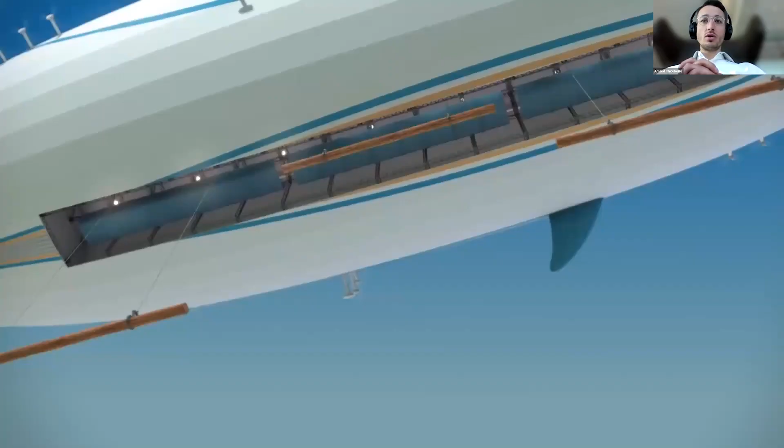So we are developing a rigid airship with a long cargo bay that you just saw. The cargo bay can hold, it's actually the length of a football field. We grab the loads for this application, for which we come from, let's say. We grab directly the loads while hovering up to the cargo bay, and then we transport it straight to the sawmill, and we go back and we do it again.

So here you can have an application which is very interesting when you have no airport, or let's say no big water airport, for such a ship. So we can take directly the containers and go straight to the delivery area.

So here is another application that is today done by helicopter, having a lot of different difficulties for assembly, the blades as well—I will show you this after.

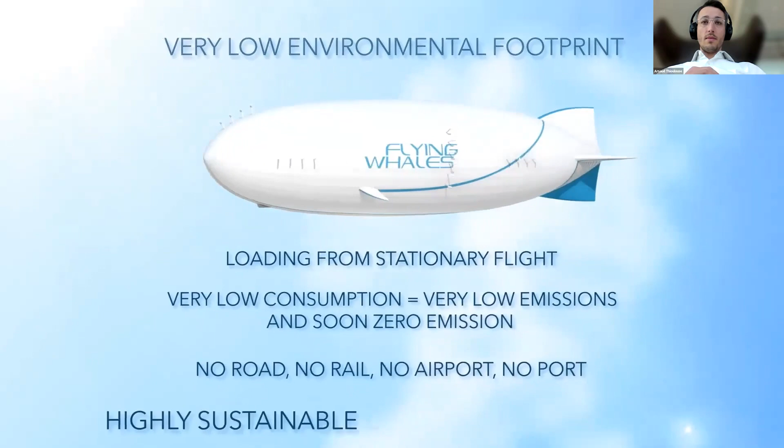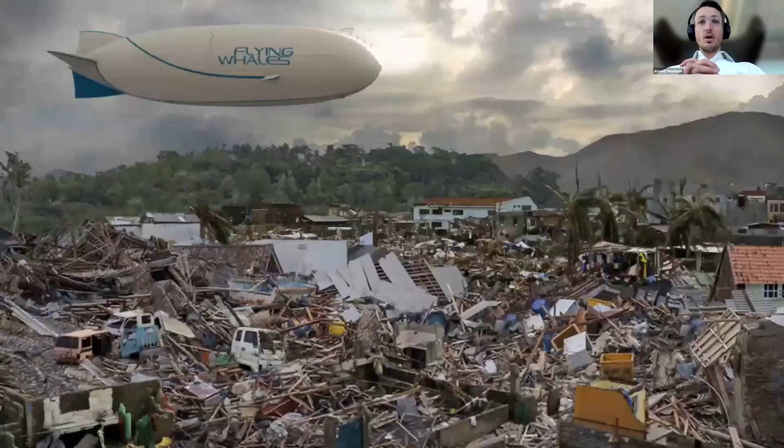So while you all know the good opportunities to have a very low consumption with an airship, thanks to the helium acting for the lift, here is an application in the French island, Polynesia Island, where they buried the garbage because they don't have any access to a big port.

Obviously, those applications are very interesting when you need immediate rescue. Thanks to our solution, we don't need any infrastructure. So by definition, when you have an earthquake or everything is broken, without any infrastructure, you can still use the airship. And also in areas where there is no infrastructure, that's where we believe we can help the cargo with an airship solution.

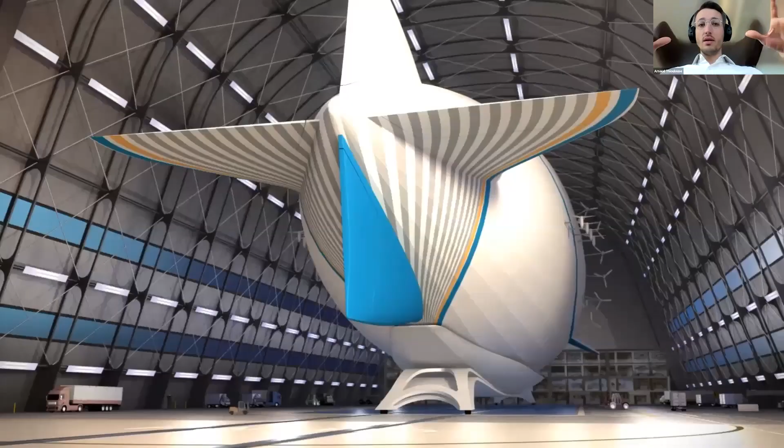So here you can see, this is a whole solution with the air dock. The air dock is capturing the airship, and the airship never lands, just floating on the air dock, so we can put it back to the hangar, being protected from the wind and the weather.

Okay, so let's start. We always start with our raison d'être to explain where we come from and what we would like to do. We are not building an airship for building an airship. We just realized that airship was the best solution to unlock territories that are remote, without any infrastructure, and airship can help to reduce a lot the environmental footprint of cargo in a different way, either by the emission.

So what is our adventure? We come from the wood industry, and it's actually our president who had a discussion with the president of the ONF, the French agency taking care of the forest in France. We have a big issue in France, wood is the second contributor to the trade deficit. But we have one of the largest forests, so we need to find solutions to remove wood from remote forests, and it ended up having the airship be a very good solution.

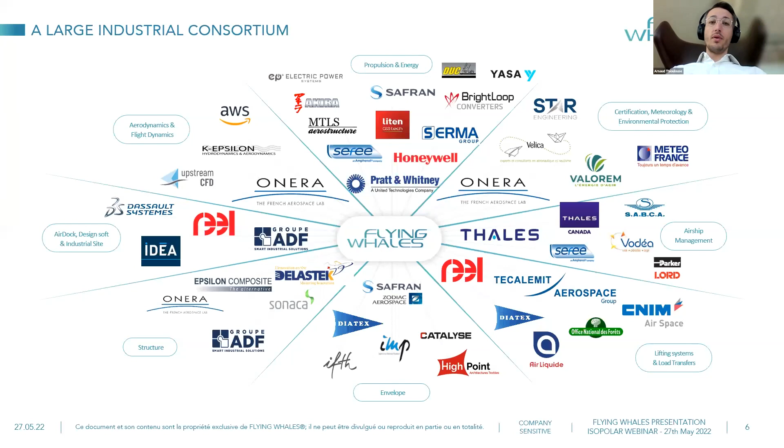Some are very famous and very big, such as Pratt & Whitney, Honeywell, Safran. But we also have mid-sized companies in the industry, not necessarily in aerospace, which makes a very good mix of good partners, most of them risk-sharing partners, meaning they are embarking on this journey, putting in their own risk due to the interest of the solution and the work we are doing together.

So where we are today, what is Flying Whales? Flying Whales, we today have two companies: Flying Whales, with part from Quebec and part from France, and Flying Whales Quebec, a subsidiary which belongs to Flying Whales and the Quebec government. The Quebec government entered into capital in 2019.

On the French part, we have a mix of public actors, like Office National des Forêts, as I said, which is actually our first customer, but also shareholder. We have La Région Nouvelle-Aquitaine, who will build our final assembly line, but also big industrial companies such as Bouygues Construction, which is very interested in the construction of our infrastructure, but also Aéroport de Paris, which is one of the biggest airport actors in the world, and Air Liquide, which is obviously very interested to be a supplier to us for the helium, and also a financial investor.

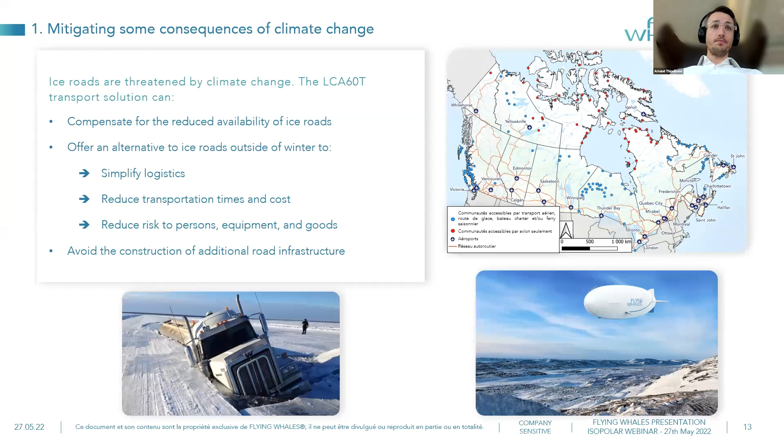We can see all the different communities that are in extremely remote areas. We identified a use case which is really interesting to look at - the community of Kashechewan, which is having, year after year, more flooding due to climate change. So they decided to move this community 20 kilometers away. The cost was estimated to be between 500 to 800 million dollars, which is extremely high for the size of this community.

We worked a little bit on this case to identify what would be the gain of having an airship such as ours to help relocalize this community, and we ended up with an estimated cost of only a fraction of what was estimated - about 20 million dollars.

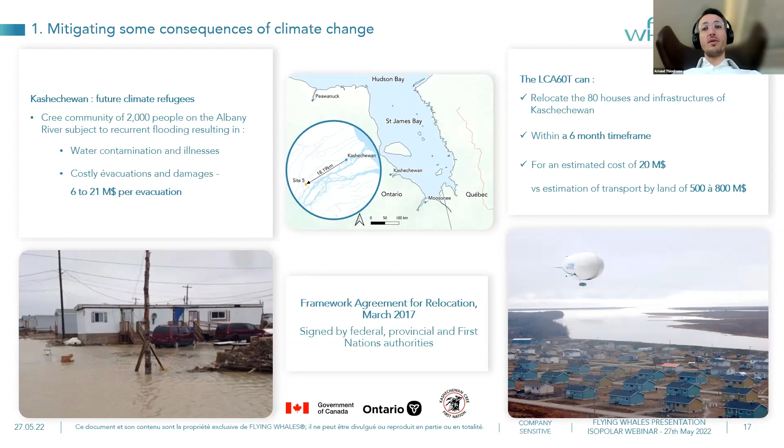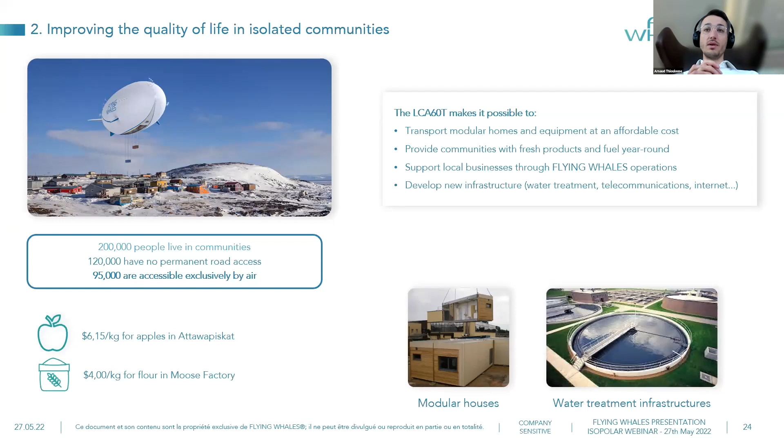As we are talking about remote communities, there are only some regular supplies that are very difficult to provide up north, and that are done through airplane today. When you use an airplane, you arrive at an airport which is still not the community. So logistics is very difficult, which makes the products extremely expensive. This will help a lot with the airship, as we can transport houses in kit, for example, or fresh produce directly to the communities.

This is a very interesting application we've been working on for a year now, but it was not our first thing. We discovered recently that we would have a very interesting application transporting a hospital that could help communities not having access to medicine today, being able on a regular basis to have the hospital coming to them.

It helps in a way that you won't have to build as many hospitals as communities; you just need to build one. You will always have good operating medical systems with good maintenance, so you don't have issues of broken equipment and so on, and also it helps people plan all these visits. So this is very interesting where you have spread communities in different areas.

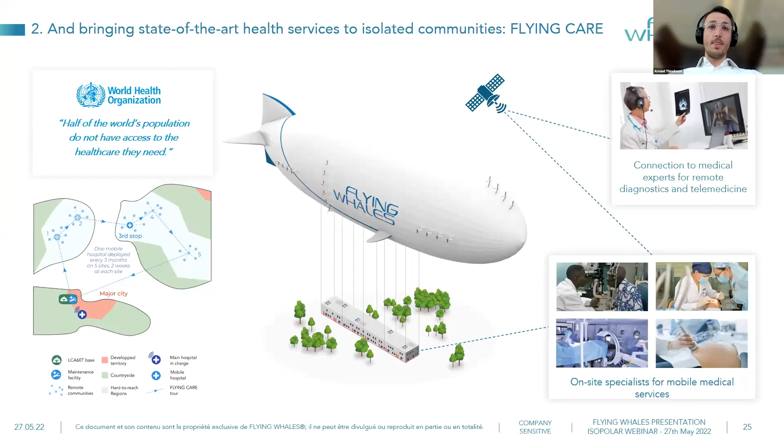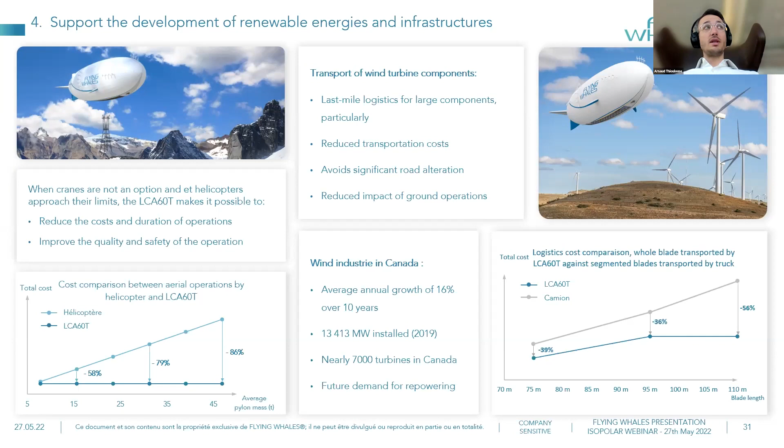There is an annual growth of 16% per year, which makes a lot of work to be done to transport those wind turbines. And also, there is not only new installation; there's a lot of repowering, because the life cycle of a wind turbine creates a lot of recurring activities over time.

To finish this presentation, we will talk a little bit about how we will improve the solution in the future. The airship is extremely interesting as the emissions and energy consumption are very low per ton compared to other aircraft or helicopters. But still, we are using petrol to convert and create our electrical system up to the motors, so that's why we are working on a solution which will be totally sustainable.

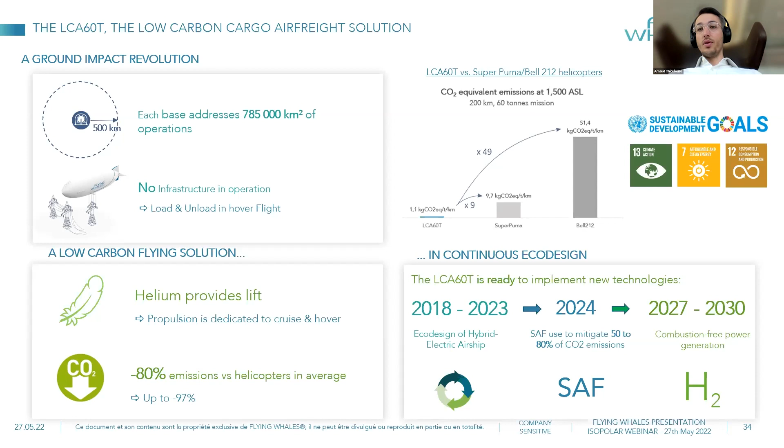As I said, we continue to improve. By 2024, we will get using sustainable aviation fuel, but the ultimate goal is to be combustion-free power generation by hydrogen, which makes zero emissions in operations. So how do we do that?

We actually will have an architecture today that makes it possible to switch our turbo generator by a fuel cell without needing to change the downstream network, which is electrical propulsion distribution, and the propellers, which is already electrical.

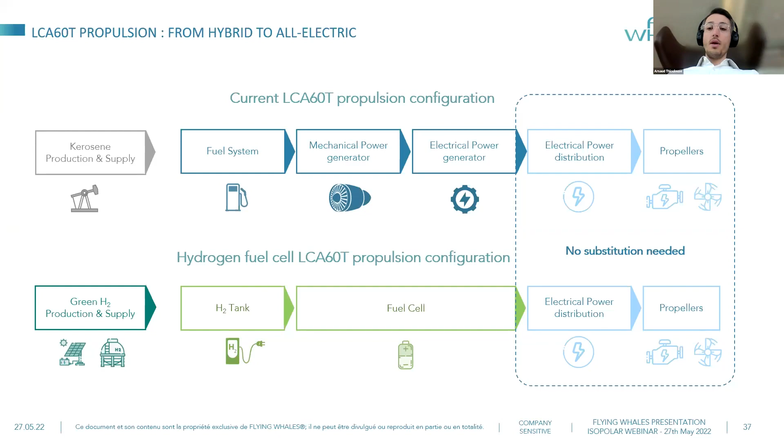So that's where we are today, showing us the interest of having the airship for remote operation, the interest of having airships for reducing cargo emissions in operations, and the way we will strive to have zero emission in the end. So thank you very much.

I hope you were not too disturbed by the airport noise, and I hope I was clear enough in my explanation.

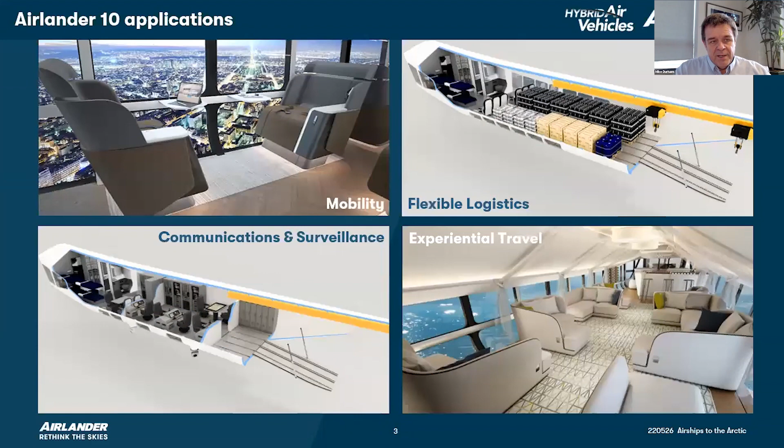But the roles we're currently focused in on, and this is purely about Airlander 10 today. I'll talk a little bit to our expansion plans in due course, but really for Airlander 10, it's a bit on the small side for a full up freighter. We've talked to customers, and there are definitely niche markets for 10 to 12 tons of freight over 1,000 miles. But really, you want economy of scale, and that's where we drive to with our bigger products for the freight side of things.

What we have picked up from customers, they are so keen to be able to operate from water. There's a lot of enthusiasm for getting away from airports to start with. But if we can get away from finding greenfield sites or landing on rocks and stuff, water operation is definitely a flavour of the month, shall we say, at the moment from the customer base we've seen. And it enables us on some of the configurations for Airlander 10.

So passenger mobility, we've been looking at sort of the 100-seat area of city to city passenger movement. And there's no doubt there's some real enthusiasm out there to be able, not necessarily to get from city centre to city centre any quicker, but to do it differently. And one of the opportunities for us is, many city centres or close to near to, they have large areas of water. There is an opportunity to change the number of segments of travel you have, not having to go out of town to an airport and then back into town from the airport at the other end.

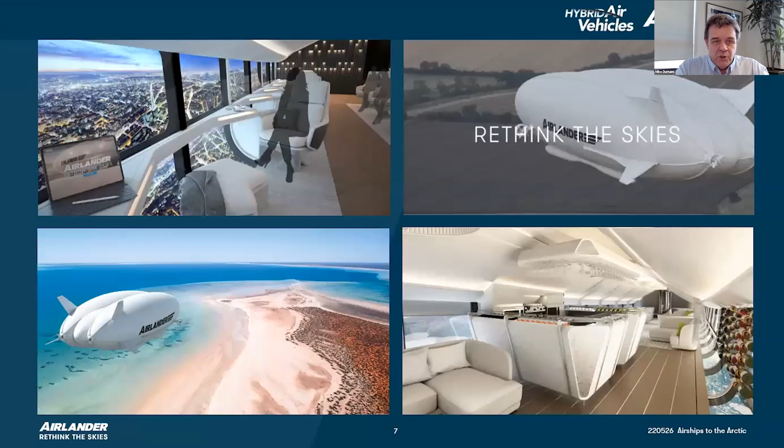We've been a development business for many years, and now we see ourselves as a production business. We've had the luxury, if I can call it that—a horrible way of talking about COVID, which has been a terrible thing—but as an engineering team we've managed to work through that. We've had 2 extra years to make sure the product we're bringing out answers the challenges out there, and it's going to be an exciting journey ahead. We're trying to deliver operational cost reductions to the transport industry and support initiatives like net zero and zero climate impact. There's a big challenge ahead, but we're up to it.

Just to wrap up, it'll be good to see more of you face to face at the conference later in the year. I think we'll focus a bit more on the technology piece there—what does an Airlander 10 actually do, how does it work for underserved places like the Canadian High North, or congested places? How might we work within containerized logistics? We'll talk a bit about our Airlander 50 and how that works as a container aircraft.

Fundamentally, we see the future of aerospace as not a one-size-fits-all solution. Our goal is just to be able to deliver societal good whilst reducing the impact on the planet. That's what we're all about. So thank you for your time.

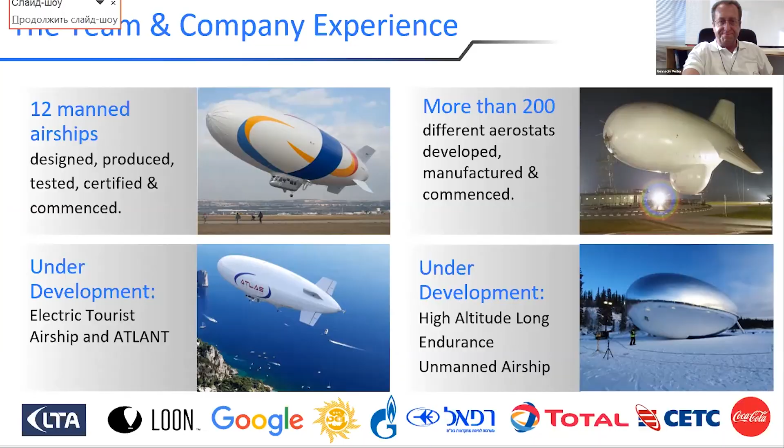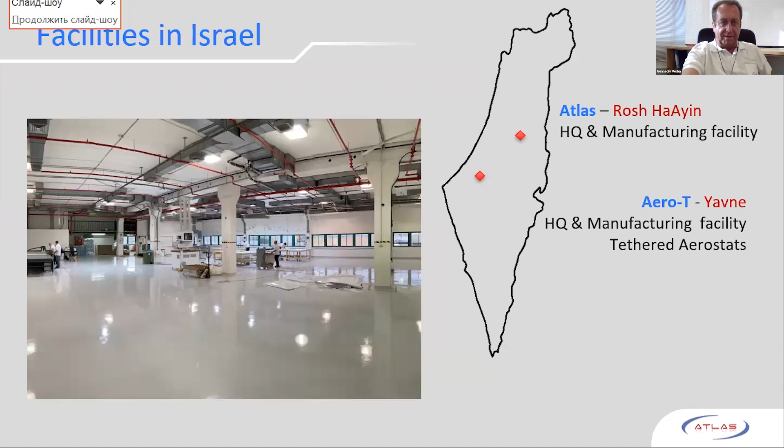So as I said, we had some kind of experience in lighter-than-air. During the last 30 years, we built 12 manned airships, and a lot of tethered systems. Right now we are working on development of sightseeing airships and also high altitude platforms. We are located in Israel. We have 2 locations, one of them in central Israel, near the town of Rosh HaAyin, not far from Tel Aviv. Another one, specific facilities devoted to tethered aerostats in the south of central Israel.

So there are several directions of lighter-than-air activities in Atlas LTA. The first one and most important for us is high altitude platforms. We used to work for Alphabet Loon for over 4 years, and we created a new hybrid concept of variable buoyancy motorized balloons. We wouldn't say airships, but motorized balloons. You can see the launch of this balloon.

Working on this project, we created new types of materials, new types of helium and hydrogen holding films, super strong and super light, capable of working in very harsh conditions of very high UV radiation and low temperatures. By the way, you see the picture of a low temperature ground test. We did this test in Canada, near Yellowknife in winter. It was almost like -40, very challenging, but very good memories about this test.

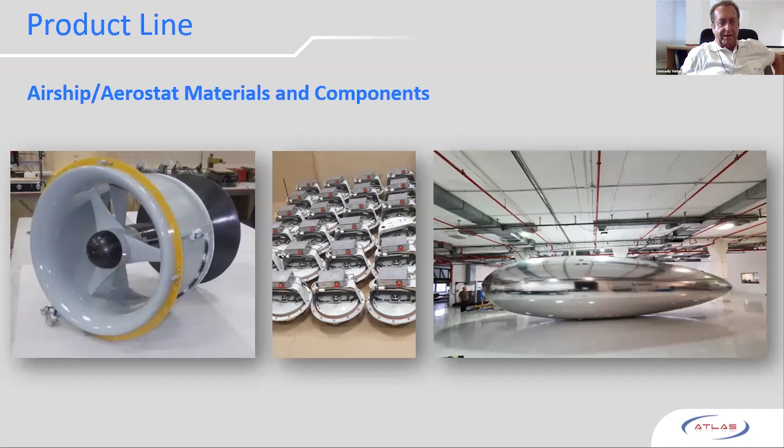Beside that, we design and produce different components for lighter than air vehicles, like blowers, valves, and gas bags for rigid airships. We think that our experience with high altitude is very useful for that, because we can use this same or similar extremely light and helium-proof films and textiles for gas bags.

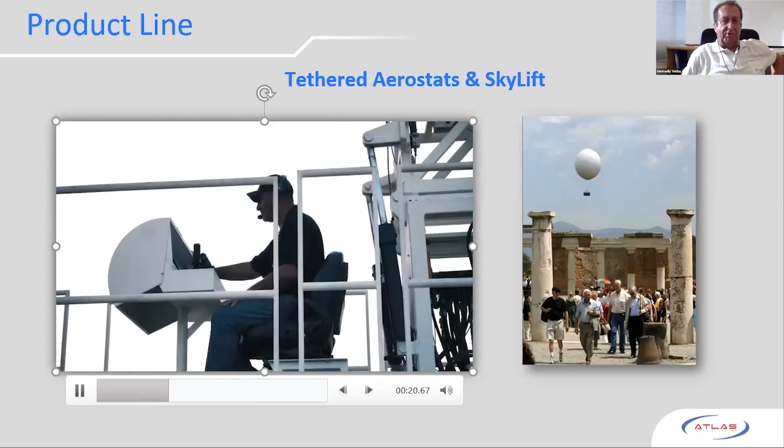Also, we produce various types of tethered aerostats, which is used for defense and sometimes for tourism, like our Skylift. Right now, Skylift is going to be certified in Israel and installed for the first time in the center of Jerusalem. Beside that, the tethered systems are extremely effective for persistent surveillance and communication purposes.

But the main project for us is Atlant, which is a heavy cargo aerial vehicle. For the beginning, we have 2 models, 16 tons and 60 tons. And in the nearest future, we will start developing the 165 tons vehicle.

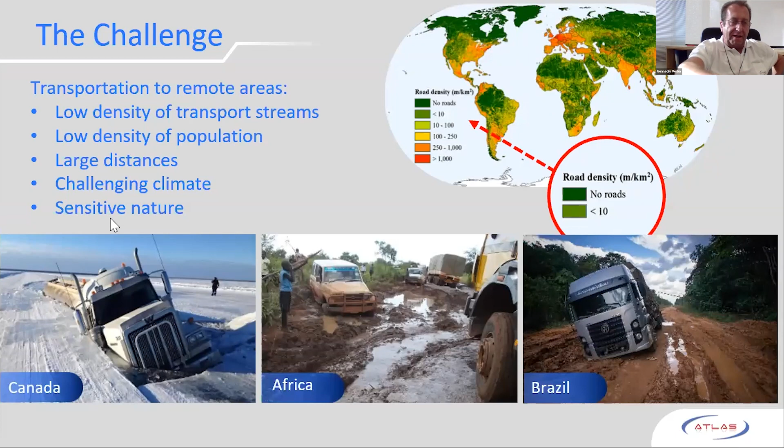We designed them mostly for 2 cargo niches of the cargo market. First one is remote areas delivery, cargo delivery. As you know, this market is very demanded in Canada, and not only in Canada — in different climate conditions this kind of activity can be extremely important.

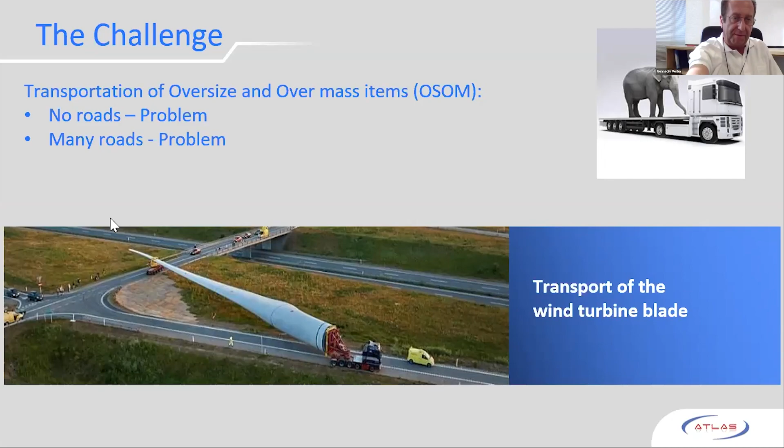Another type is oversize, overmass cargo delivery. A great example is windmill blades, which are extremely difficult to transport using trucks or any other ground systems. Both of those markets are niche, but this niche is quite big. If you look at the size of the market, it is estimated by the international expert community at over 20 billion.

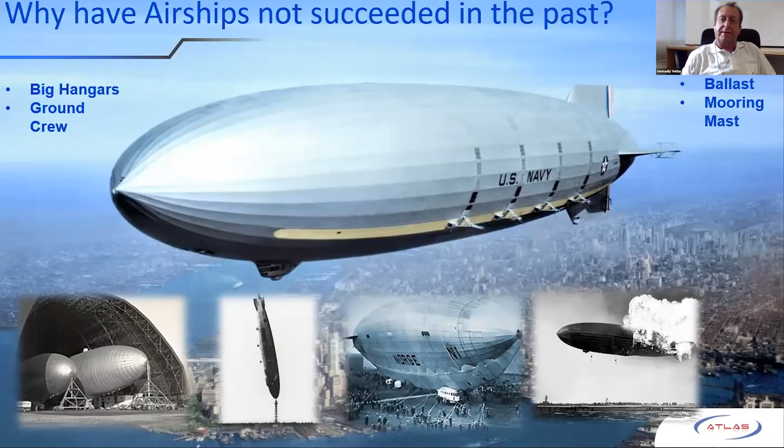Many people are asking why, by now, any airship projects haven't succeeded practically. In the past we had beautiful airships, and the natural question is why those creations didn't succeed. We have practical experience with conventional airships, and our answer is mostly that the problem is with ground infrastructure, like big hangars, ground crews, and also operational difficulties, like the need for ballast. In the past, there was use of hydrogen and some other very important issues.

We had to learn from that, and we created a newer concept, which is basically designed to perform point-to-point delivery of heavy cargo and delivery to unprepared sites. In the future, when the regulations are developed, we can perform unmanned flights.

We are aiming for low operational cost, very large cargo size, and of course, which is very important now, it should be very sustainable, with very low CO2 emissions. Also very important — it should have the ability to operate in harsh weather conditions.

We are aimed at operation with physical landing on the ground, surviving not only in flight but also after landing, because it's also very challenging in the north and in harsh weather conditions like snow, very cold weather, and very windy conditions.

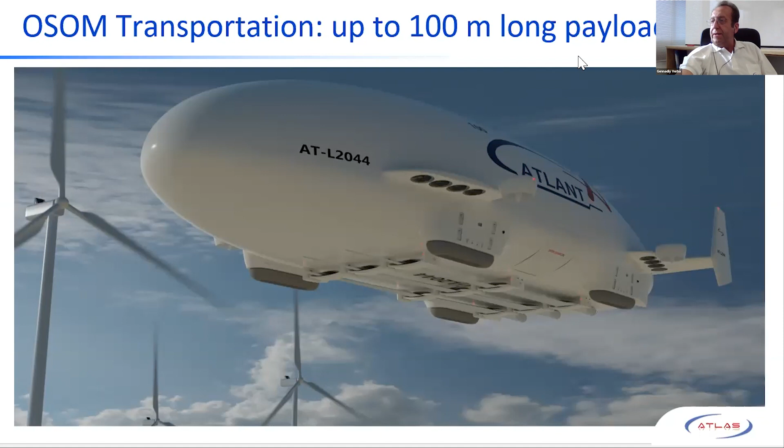Another challenge is very large cargo. Although we have a very large cargo bay, we also consider carrying cargo outside the cargo bay.

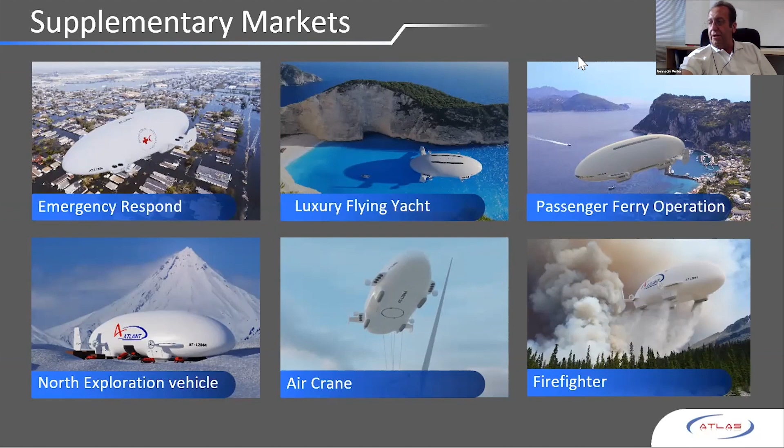So here are additional ways of using our Atlant, like emergency response, which is very important. Of course, luxury travel and passenger travel. Very important is northern exploration, capability to carry cargo on trusses, with limited weather conditions, and also firefighting operations.

It's important to say that our design is very suitable for quite large passenger space inside the Atlant. It's about 460 square meters for the smallest Atlant, which is Atlant 30. We can accommodate passengers and create public areas on board, and the capability to land anywhere makes this configuration very effective for experiential travel.

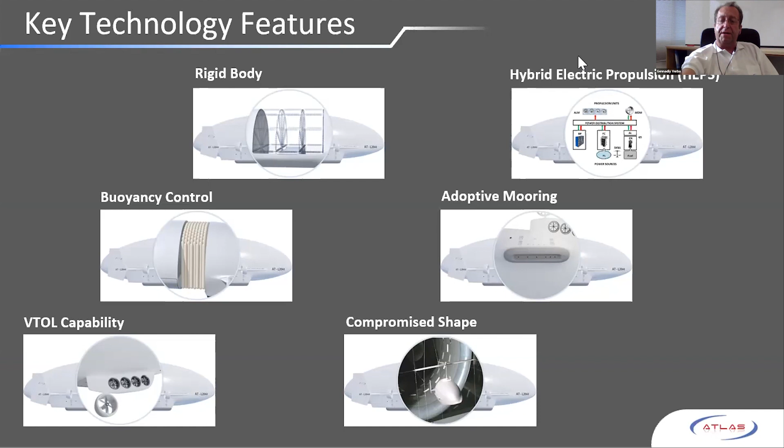Using pressurized air as ballast. Also, we need to have VTOL capability — the ability to land on any flat surface using adaptive mooring, which we'll talk about later. And also, of course, a compromised shape, which is typical for hybrid airships.

Let me launch a small video with sound explaining most of that.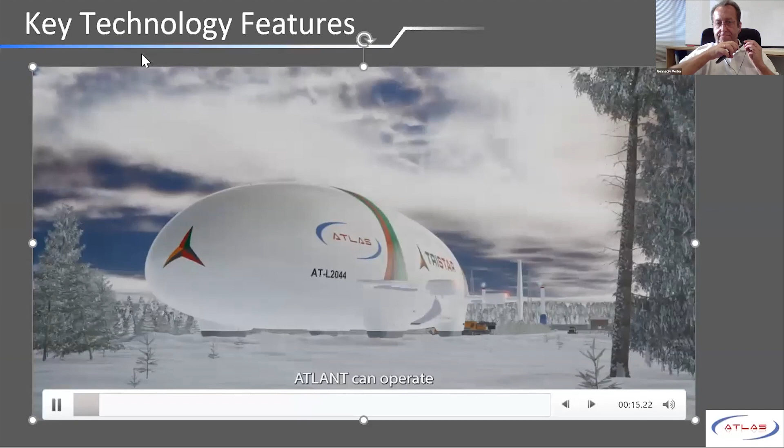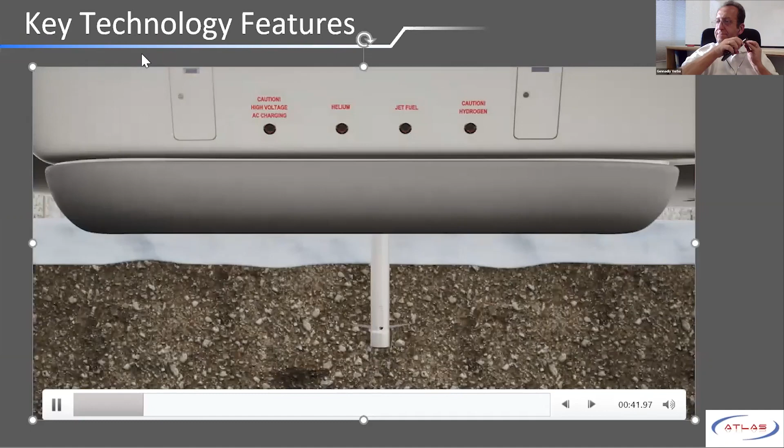Atlant can operate in most all conditions from -50 to 70 degrees Celsius, in rain, snow, or any other weather. Atlant can land on a flat surface, and when landing on the ground, deploys its self-mooring system to anchor the aircraft in one place. It requires no infrastructure and can reach its destination directly.

The Atlant 100 can carry up to 60 metric tons, and the much larger Atlant 300 can carry up to 150 tons. The cargo bay is enormous, up to 36 by 11 by 7 meters in dimension, totaling 2,400 cubic meters. Compared to other large cargo aircraft, they are all dwarfed by the Atlant 100. Oversized cargo such as turbine blades can be externally mounted.

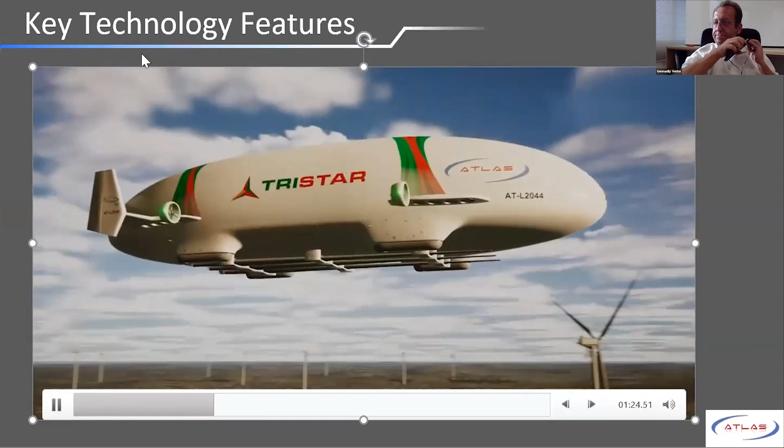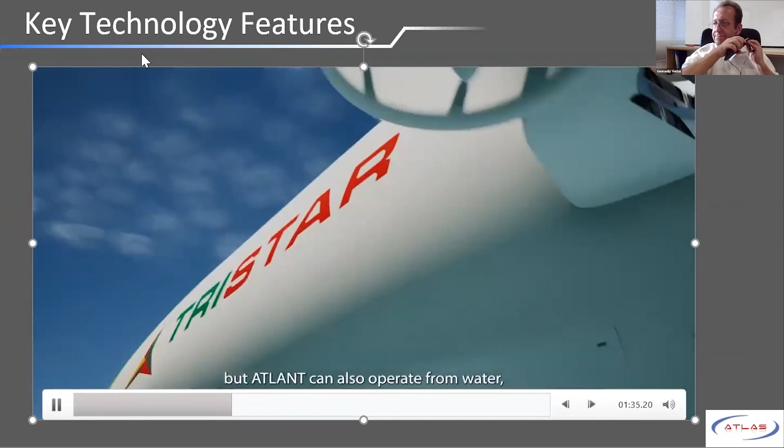We've seen Atlant's ground anchors, but Atlant can also operate from water, even in waves up to 2 meters high. The Atlant's water mooring system works by lowering an empty tube into the water, which fills with water, thereby creating a sea anchor that keeps the aircraft stable.

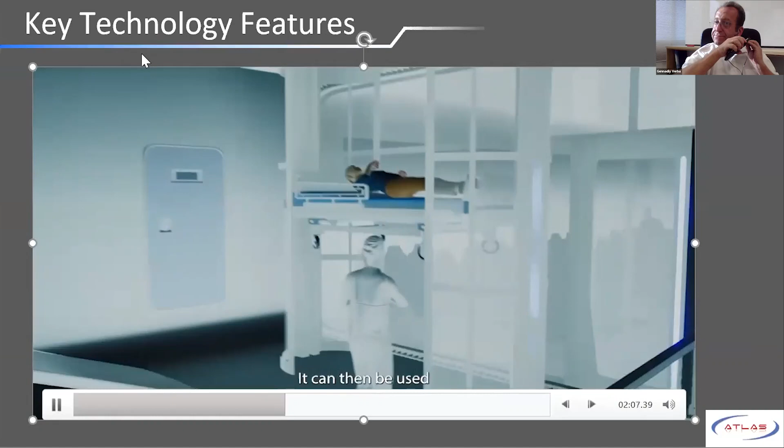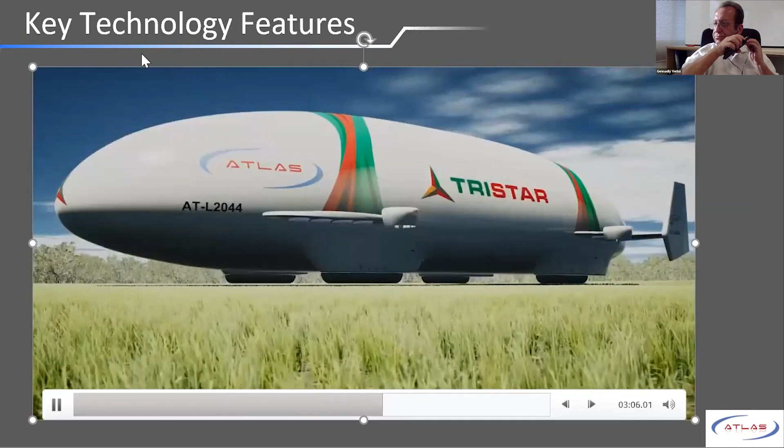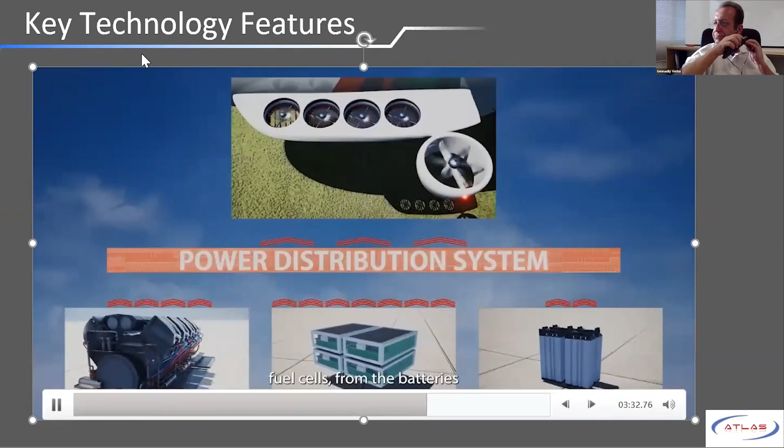The Atlant is VTOL capable. For this type of VTOL operation, 3 to 4 times the power is needed for a short period. Besides the main power sources, which are diesel generator sets and fuel cells, for VTOL operations we use high-capacity battery packs designed for very rapid discharge. During the vertical phase of flight, power is put into the power distribution system from the hydrogen fuel cells, the batteries, and the diesel generator sets all at the same time. However, when we transition to horizontal flight, the diesel generator sets and hydrogen fuel cells feed the power distribution system, which is used by the main drive, but also to charge the batteries.

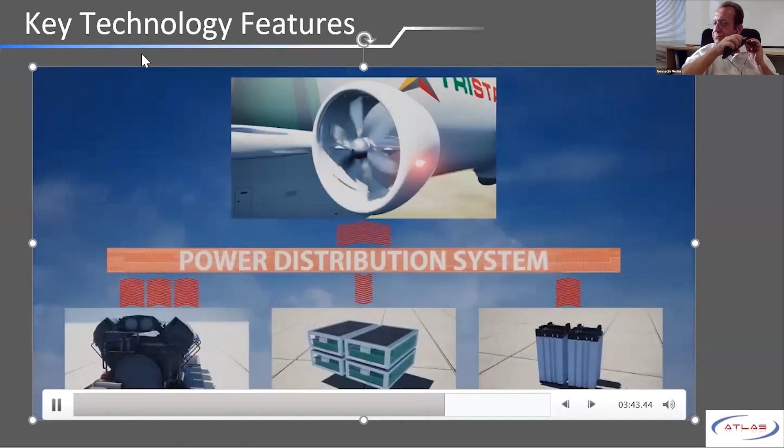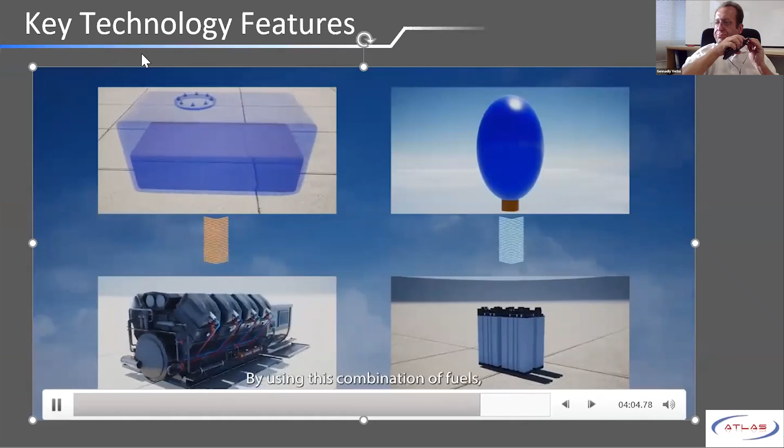To ensure that the airship remains in balance during horizontal flight, we use both hydrogen to power the hydrogen fuel cells and diesel or jet fuel to power diesel generator sets. We call it the dual fuel ballasting system, the DFBS. By using this combination of fuels, we keep the airship in balance, because as we use hydrogen in the fuel cells, the amount of lift reduces, while concurrently the weight of the aircraft reduces as we burn jet fuel or diesel.

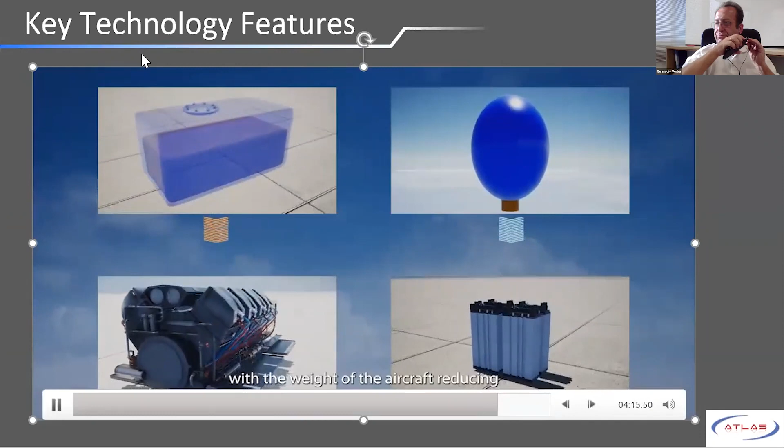The footprint for each ton kilometer is reduced by up to 70% compared to traditional cargo airplanes, and up to 4 times less carbon footprint compared to the most efficient helicopters in service today.

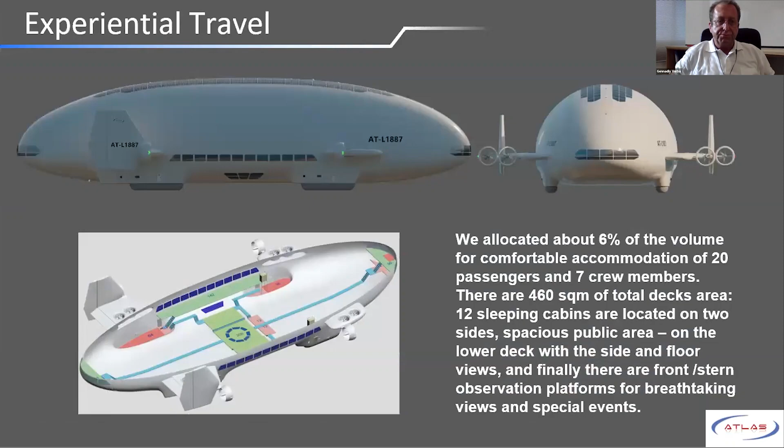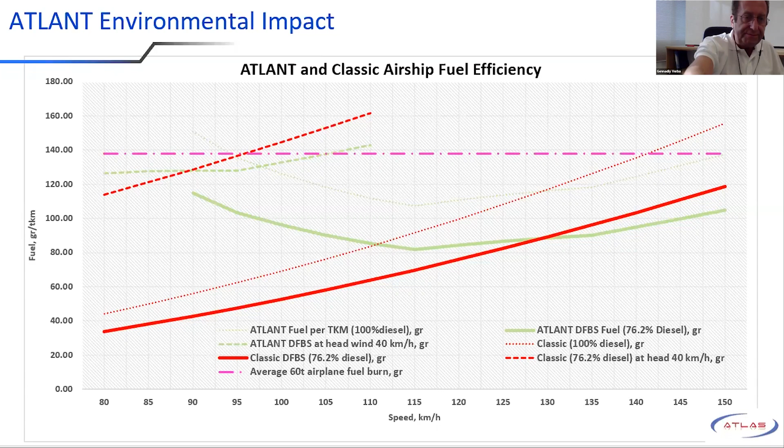But the next step will be a fully electric or hydrogen hybrid electric version, which will use hydrogen and fuel cells. In our projection, we think we can achieve this result much faster than fixed-wing aviation. You see the comparison: 10 years, not 15 years. The weight impact is much less. I will explain why we have this advantage. And additional cost is also less than for fixed-wing aircrafts.

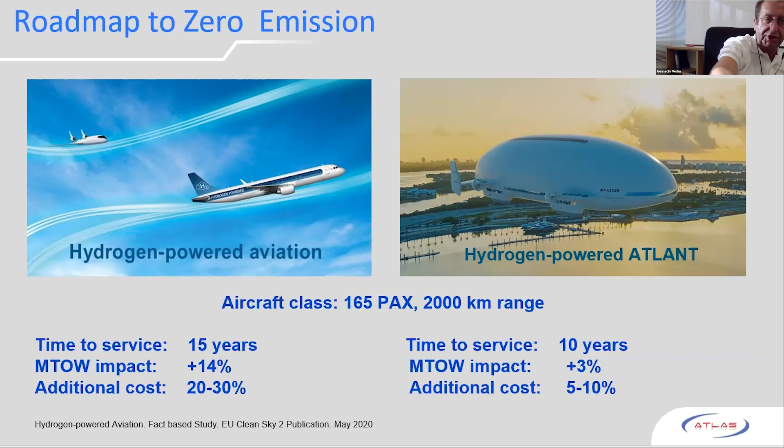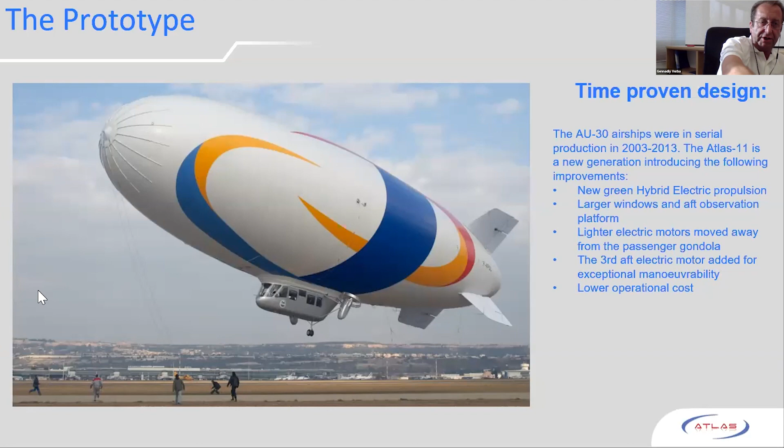A very important step toward Atlant is building the conventional airship for sightseeing, which is much smaller, but with scalability of the technology leading to the Atlant. It is based on the time-proven design of the AU-30 airship, which we produced back 15 years ago. We produced 5 of them and used them in different conditions, including cold weather. We decided to make a deep modification of this airship, changing the propulsion to electrical and hybrid electric systems.

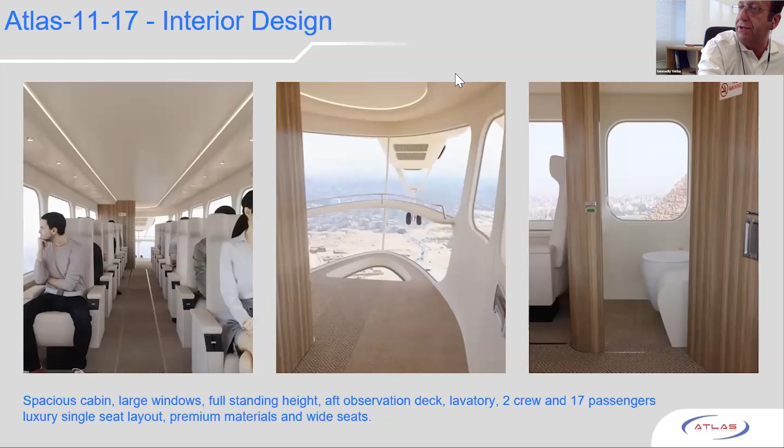Here is the appearance of this aircraft. We moved the propulsors far from the passenger gondola and also added a third propulsion unit, located on the back of the envelope, adding maneuverability. Also, some design features provide unique comfort in the first class cabin and also in the economy class cabin. But the main difference is the

electric propulsion, which is under development together with our partners, an Israeli company called Albus. It is based on a diesel generator, using a German diesel engine, red A03, and a battery pack. But in the future, the same airship can be a perfect base to test the hybrid electric system. The hybrid electric system will replace the diesel genset with fuel cells.

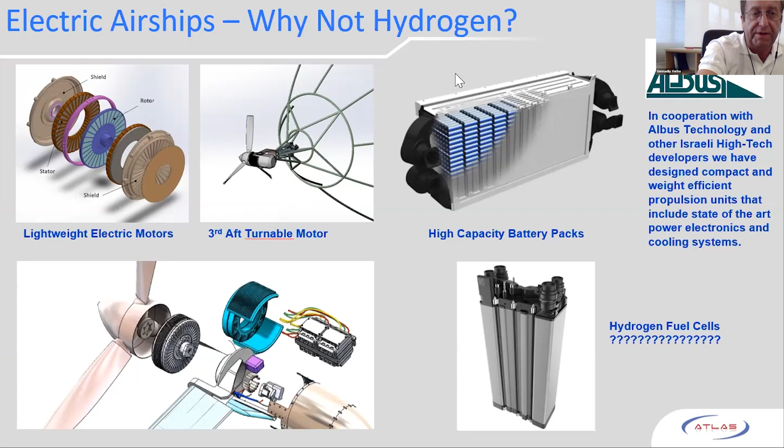But the most important thing is how we are going to store hydrogen. It sounds probably a little bit difficult from the point of view of certification authorities. We are storing hydrogen inside the helium envelope in separate volumes, in separate envelopes. Again, those envelopes are also based on our achievement in material development.

As you see from the beginning of the flight, we have a minimal heaviness of 50 kilograms, but by burning hydrogen, we increase the heaviness, bringing it to 300 kilograms after 5%, after 100 minutes of flight, and then 600 kilograms after 200 minutes of flight. For an 11,000 cubic meter airship this is completely acceptable heaviness, less than 7%, and 200 minutes is more than enough for any sightseeing flight.

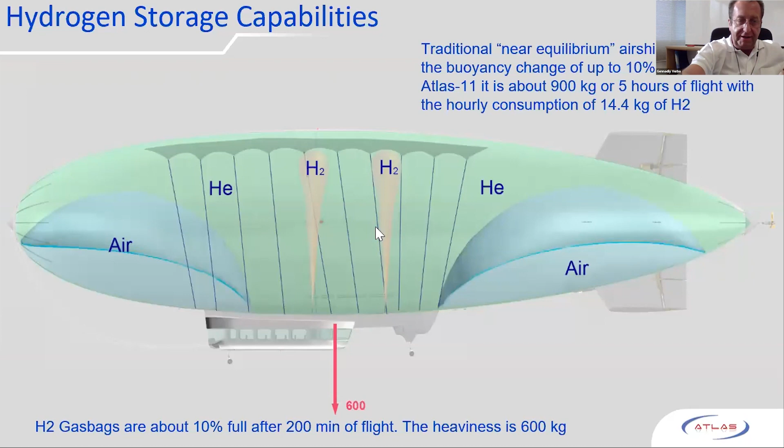So this is the chart showing the requirements for fuel cells. The fuel cells have power starting from 240 kilowatts for cruise flight and ending up at 330 kilowatts for the maximal speed mode. The gap between them, as you see on the chart, will be covered by the batteries for a short time.

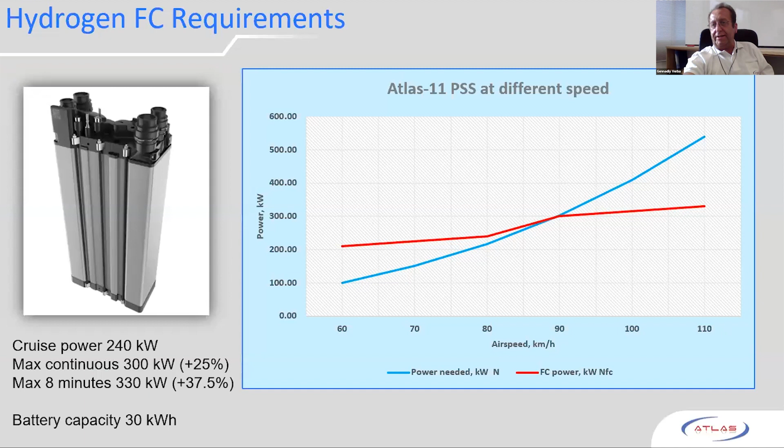So that's a very important step toward Atlant, because the smaller Atlant 30 is basically 4 times bigger from the propulsion point of view than the Atlas 11 airship, and we just use 4 propulsion systems of Atlas 11 to build the first Atlant.

So basically that's all. Thank you very much, and I'm ready to answer the questions.

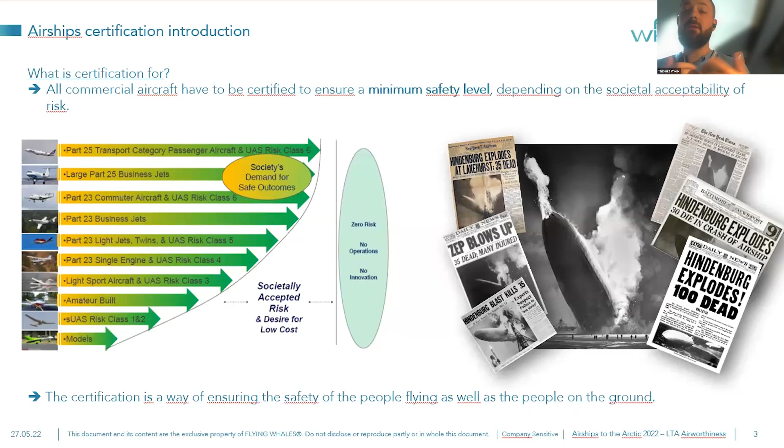So for airships, we have to go in the same direction. We have to find where we should position ourselves on this scale. What is the proper level of safety we should put in place, that we should ask airships to comply with? And then what is the proper level of certification we have to comply with and make the demonstration for? So that was the first idea.

Then when we want to go deeper into what certification is, certification is not just certifying a product. Okay, the type certificate is one thing, but actually you have a lot of other things that have to be certified. I put here in my slide some different approvals that any company developing, producing, operating, or maintaining airships or airplanes has to comply with.

So a lot of approvals that they have to get. Actually, certification is for any type of entity that is part of building up this machine, making it fly, operating it, maintaining it. So you have to certify the product, you have to certify the company that is designing the product, the company that is producing the product, the company that is operating the product, even the company that is licensing the maintenance personnel. So you have to have a lot of approvals.

Again, this can be seen as a huge administrative burden, but it's a useful one, because this is the only way to make sure that we'll make no mistakes, and at the end of the day, we will develop and operate a safe product.

You have to work with several civil aviation authorities, regulators. So we have ICAO, the International Civil Aviation Organization, an entity from the UN located in Montreal. But you also have in each country a civil aviation authority. In Europe we have EASA, in Canada you have TCCA, the USA has the FAA. And so you have to make demonstrations to these authorities to make sure that you are developing a safe product.

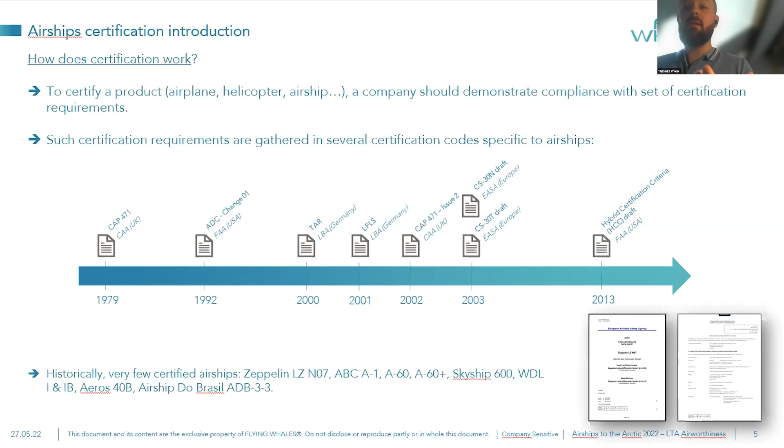The problem we faced at Flying Whales many years ago, when we started building this machine, was: what kind of regulations should we take to certify it? At this time my head of design organization and CTO asked me, okay Thibault, what are the set of requirements I have to comply with?

I looked at the existing codes and said, okay, CS30T or TAR, Transport Airship Requirements, built for the Cargo Lifter project more than 20 years ago, made the most sense for us. So I pushed that code to him and his team.

A few months later he came back to me saying, well, this is so complex to comply with, it's not adapted to what we want to do. It's too design prescriptive, it doesn't capture the design and operational specificities of our airship, and we don't really understand the history of these requirements.

When I looked deep into this code, what bothered me a lot was that the safety objective supposed to be covered by this code was not really the one we identified. So we were missing the real target of what a certification code is meant for, which is to cover safety objectives. So we had this issue.

CS30T was only partially applicable. I'll put up the schematic of our analysis at this time. Let's say 50% of it was applicable, but 50% was not understandable, had to be deeply investigated, and had to be modified or questioned. So it was quite complex to comply with this code.

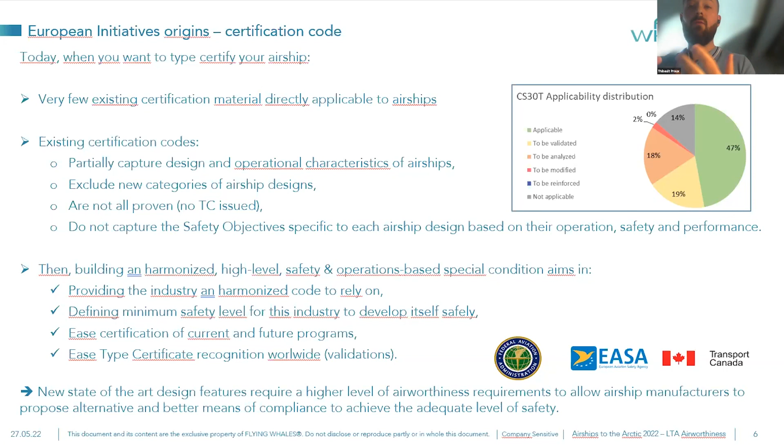Then we had an important discussion with EASA and with Hybrid Air Vehicles, Zeppelin, and WDL, as Mike presented earlier, I think in November 2018, where we raised this issue. Together we decided to build a group named Airship Manufacturers and Operators, where we set up two task forces. One was especially on the certification codes, to have a harmonized code with Zeppelin, Hybrid Air Vehicles, and Flying Whales, even though we all have quite different types of airships.

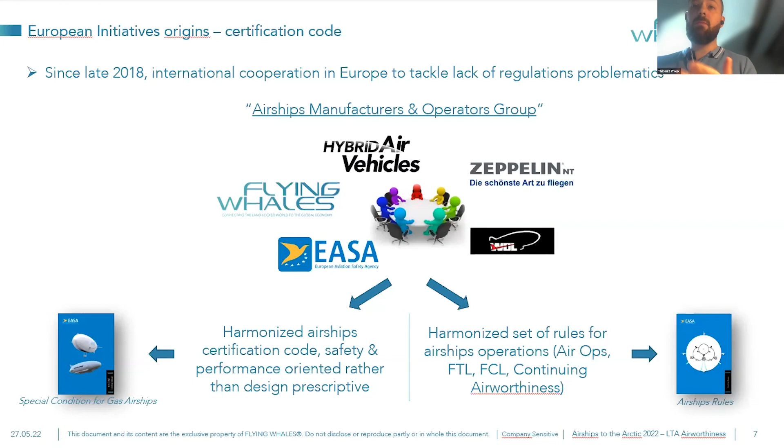Passengers, cargo, hybrid, pure equilibrium, rigid, blimp, or semi-rigid - there's a lot of different types of operations and design features, and we wanted to have a harmonized code. So it's a quite difficult approach to converge the certification codes. The second task force focused on the rules for operations: air operations, flight time limitations, flight crew licensing, and so on. Since 2018, we've been working together in partnership and cooperation to build up these regulations.

On the certification code itself, I won't go into all the details, but we follow an approach that was built up by EASA around 2017 on CS23 Amendment 5, for general aviation, and on VTOL, vertical takeoff and landing vehicles. So we follow the same approach. We look into all the existing regulations for airships, and we try to cover the essence of safety for airships, and we push the code with hybrid air vehicles.

We pushed the code to EASA around the end of 2020. It was a long process since 2018 to reach this harmonized code with hybrid air vehicles. Then we pushed it to EASA, which went through an internal process and then public consultation, and finally that iterated the code up to a final publication at the beginning of this year. So as you can see, it was many years of activity with hybrid air vehicles and EASA.

This resulted in the special condition for gas airships, which is quite basic—about 30 pages of requirements. When you look at it, you think, yeah, that's obvious. If you want to fly your airship in lightning conditions, you have to protect against lightning. It makes a lot of sense. Nonetheless, it defines a proper safety objective for airships, and this is the first time EASA is officially publishing a certification code for airships.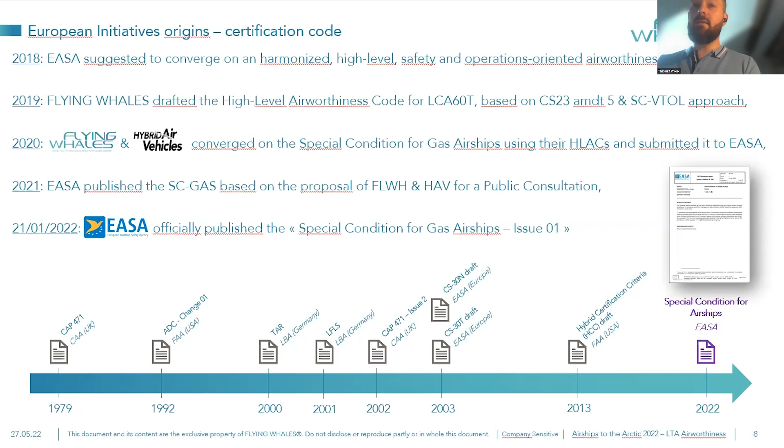So I'll go a little deeper into the SCGAS published by EASA. It's a code that allows you to design and certify an airship using any type of lifting gas—hydrogen or helium. You don't have a strict requirement saying usage of hydrogen as a lifting gas is banned. That's not what you'll find in SCGAS. Instead, you'll find something that allows you to use hydrogen, but you obviously have to demonstrate that it's a safe usage.

I didn't mention hot air airships because there's already a certification spec for that. But it's also a code that allows you to develop and certify any kind of airship structure—purely rigid like Flying Whales, semi-rigid like a Zeppelin NT, pressured airship, metal clad, whatever structure you want, you can use the SCGAS. Same goes for lift capacity.

Are you using a pure equilibrium airship or a hybrid type of airship? Well, you'll see some requirements that are specific to each type of airship lift. It also covers almost all types of propulsion systems.

For instance, in Flying Whales, we have a quite specific hybrid electrical propulsion system. I doubt we can use only SCGAS to integrate fuel cells yet—it's something we've had in mind for a long time. I think it's quite innovative, so we'll maybe have to use other types of certification specs or special conditions that are ongoing at EASA if you want to integrate such technology.

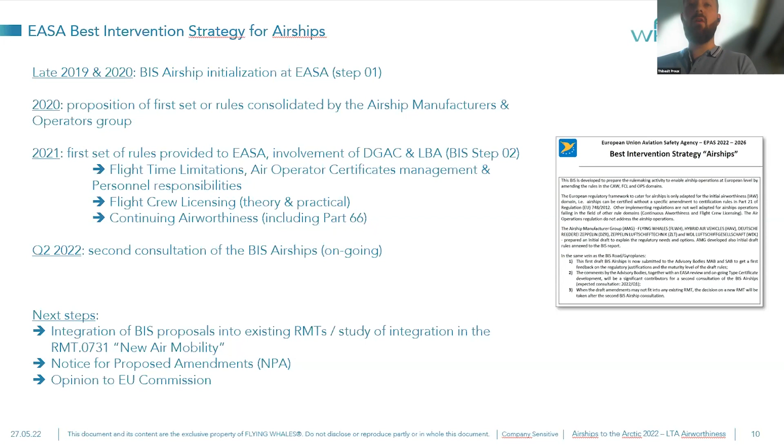Then we'll have to go for notice of proposed amendments, and one day, an opinion to the EU Commission. So here we are in a multi-year process, and that's why we started super early for our project, because even if we are not operating the airship 2 years from now, but maybe in 4 or 5 years, we have to tackle it today. As you can see, it's a huge effort - we put a lot of resources into this to make sure we'll have the proper rules ready on time.

Just one more detail on the airship best intervention strategy: again, 4 main focus areas - air operation rules for personnel, the air operator certificates and so on; flight time limitation, when you want to fly many hours or days in a row; continuing airworthiness licensing; and flight crew licensing, which has even been discussed at ICAO level. All these rules are non-existing today for airships. If you want to adapt what exists, it's already quite a huge challenge, but we have no choice - we have to adapt what is existing. Sometimes we have to build new regulations, and it's a really long process. That's why we anticipated it many years ago.

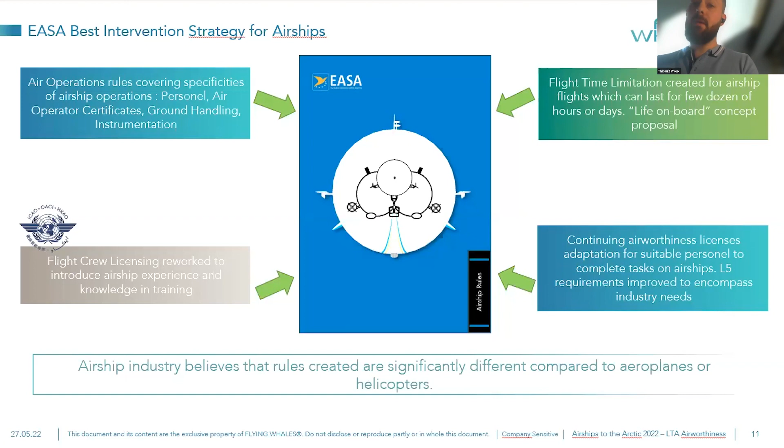As a conclusion, we spend significant time on the European side with HAV, Zeppelin and WDL to build up the regulatory frameworks in terms of type certification and air operations, to make sure we'll be able to certify these machines, to certify the operations. At the end of the day, this is paving the road to the next generation of airships, next programs, but also the next generations of airships.

So we have done it on our side. We spend a lot of time and effort on this. We are progressing quite well - we have some good achievements already with the SCGAS publication, with the BIS first steps that went quite well too. We are still in the process of continuing this progress. My point is, we again spend a lot of time on this, and this can and should be beneficial for everyone - it can be useful for a lot of other types of airship products, a lot of other types of operations. At the end of the day, this is, in my opinion, the best way to ensure that this industry will develop itself.

So again, these initiatives can and should be extended out of European borders. It will ease the mutual recognition and validation of our type certificates, our operations, and so on. Again, it's beneficial for everyone.

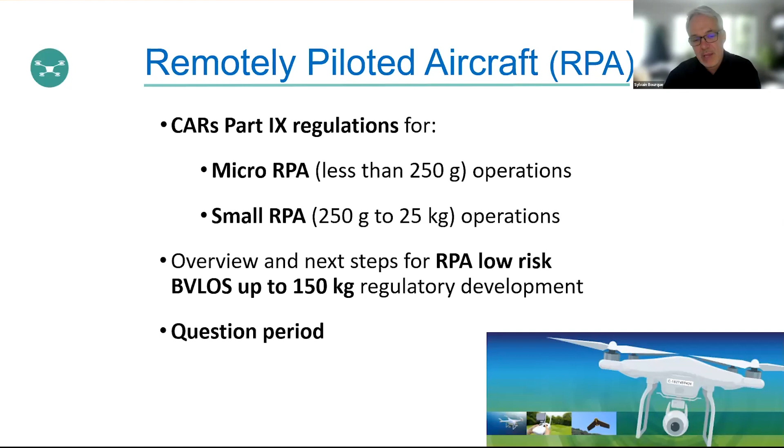For this presentation, we'll cover CARS Part 9 regulation that is enforced for micro RPA and small RPA, which is 250 grams up to 25 kilograms. I'm also going to share what we are actually working on: low risk BVLOS operation up to 150 kilograms. After that, we'll have a question period.

CARS Part 9 has been in force since June 2019. In Part 9, a drone is named a remotely piloted aircraft, or RPA. The CAR definition is a navigable aircraft, other than a balloon, a rocket, or a kite, that is operated by a pilot who is not on board. So when you fly a drone, even a small one, you're a pilot of an aircraft and regulation applies. The RPA plus the control station is called the remotely piloted aircraft system, or RPAS.

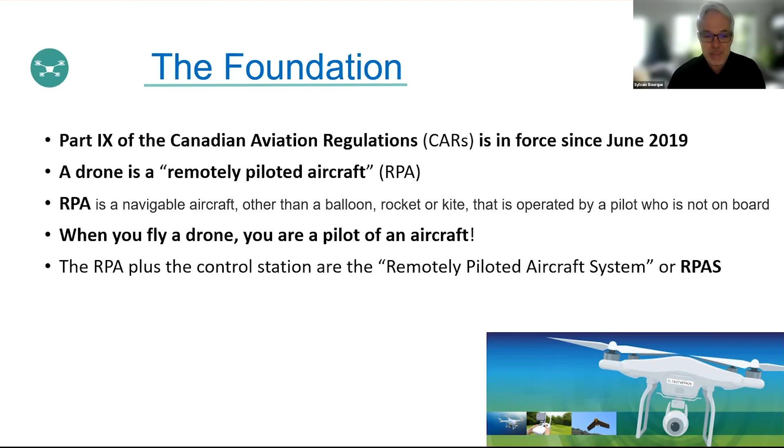As a summary, there are 3 RPA weight categories covered under CARS Part 9. First, below 250 grams, which we call the micro RPA. Small RPA is 250 grams up to 25 kilograms, with 2 operation categories, basic and advanced operation. And third, above 25 kg, there's no specific regulation on this weight category, but you can operate them under an SFOC, a Special Flight Operations Certificate.

CARS doesn't apply to RPA operated indoors or underground. Like I said, we're working on a regulatory development process for low-risk VLOS and BVLOS operations up to 150 kg.

So quickly, for small RPA, 250 grams up to 25 kilograms, there's basic operation, which is mainly when you're flying your RPA more than 100 feet or 30 meters from other people, or flying in uncontrolled airspace, and also more than 3 nautical miles from airports and more than 1 nautical mile from heliports. In Canada, aerodromes are where most of the activity is. For basic operation, you can fly close to aerodromes, but not airports, which are aerodromes holding a certification.

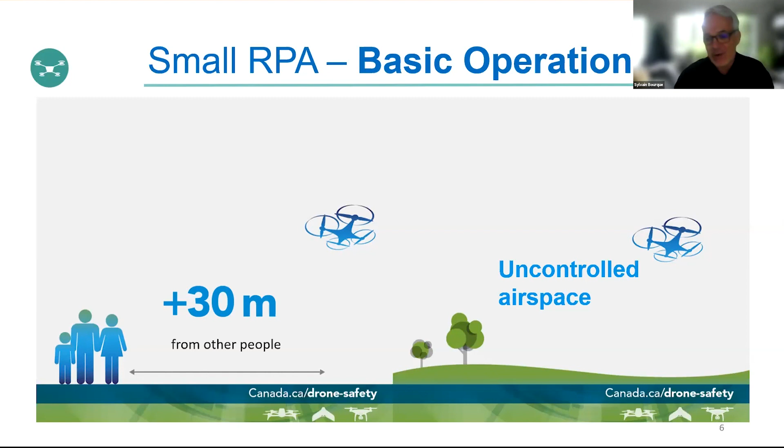For advanced operation, it's when you can fly less than 30 meters or 100 feet from people or over other people, when you can fly in controlled airspace, or less than 3 nautical miles from airports, less than 1 nautical mile from heliports.

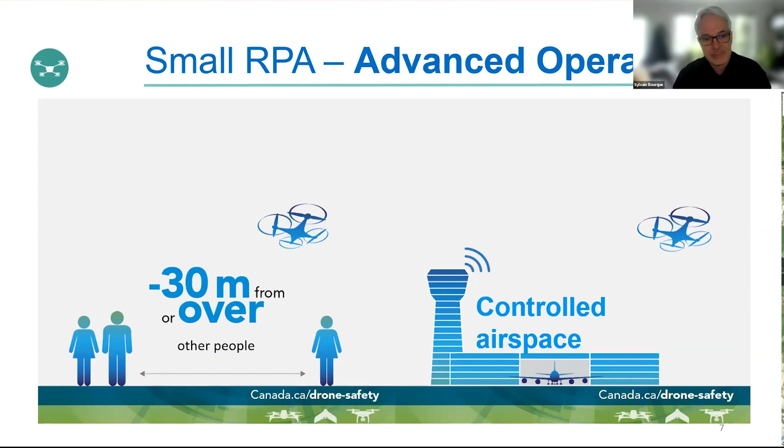We developed some tools for small RPA pilots to know if they're flying in controlled or uncontrolled airspace. There's the drone site selection tool, hosted by NRC, and also the Nav Drone viewer, an interactive map. RPA pilots can have a Nav Drone account, used to send control airspace requests to fly in controlled airspace, and receive authorization. Most control airspace authorizations are given automatically when, let's say, away from airports and in a low risk environment, so it's instant.

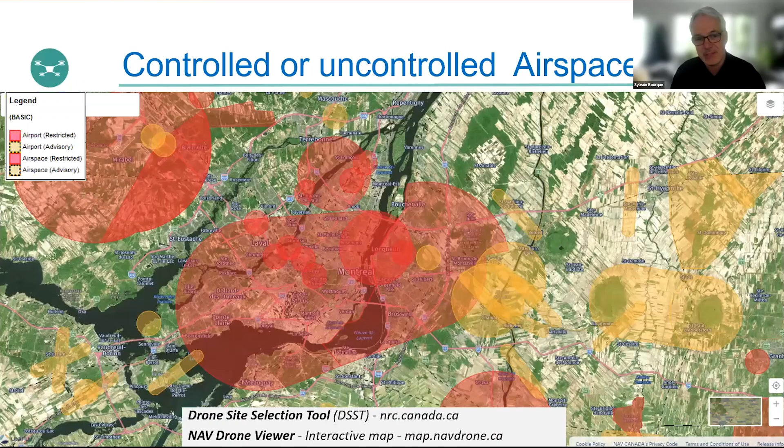Can I fly above 400 feet AGL over infrastructure? This is a question we often receive. The answer is yes, since in our regulation it's permitted to fly legally 100 feet over a structure and 200 feet horizontally on each side. This is possible, let's say over a CN tower, a transmission tower like a TV transmission tower, or even a power line. That may give you some ideas for the future BVLOS operations, that if they're 100 feet and below an infrastructure, they're respecting CAR Part 9.

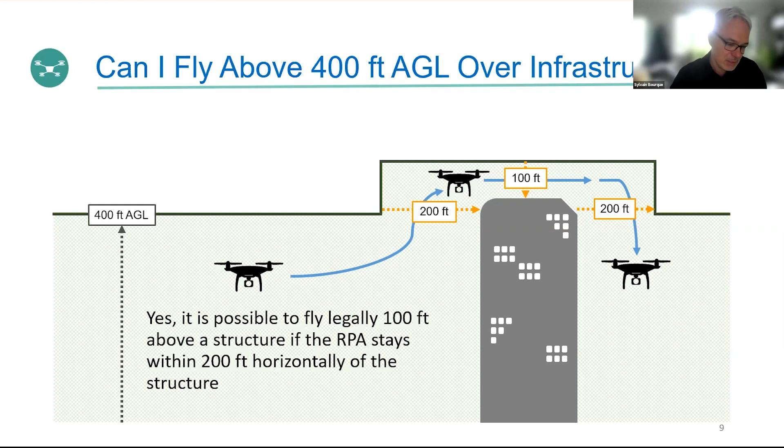Keep in mind that other rules may apply. We often receive questions about privacy, like someone using a drone to film inside a house. Can we do something about it? No, Transport Canada regulates the airspace, but not how people use the aircraft.

There may also be other federal, provincial, or municipal legislation that applies. For example, Parks Canada has rules limiting drone use in national parks, and similarly some provincial and municipal parks have restrictions. Also check limits on wildlife, since species at risk acts or marine mammal regulations also apply to RPAs since they are aircraft.

So that's it for the small RPA regulation. As a summary, all aircraft, including all RPAs, need to stay away from restricted airspace, NOTAMs, forest fires (5 nautical miles), and away from emergency situations. Small RPAs need to be registered, kept in VLOS, and at or below 400 feet.

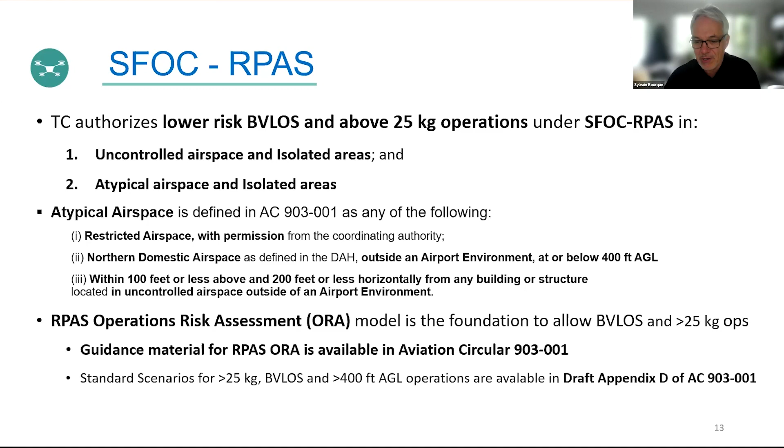So low risk BVLOS was published in... we're working on the next regulation, which is a low risk BVLOS regulation, and that covers up to. So it was published or announced in the CARAC in April 2020 as a Notice of Proposed Amendment, NPA 2020-012, on RPAS low risk.

After this announcement, we received 230 stakeholder submissions in the 60 day comment period. So now we're working on finalizing the regulatory package. If you go to the CARAC NPA 2020-012, you will see on the right other documents listed on my screen, if you want to know more about what's coming.

So the regulatory package will be announced in Canada Gazette Part 1 at the end of this fiscal year. We're looking at the end of 2022, but we're not controlling the issuance date. And Part 2 is usually one year after CG1 is published.

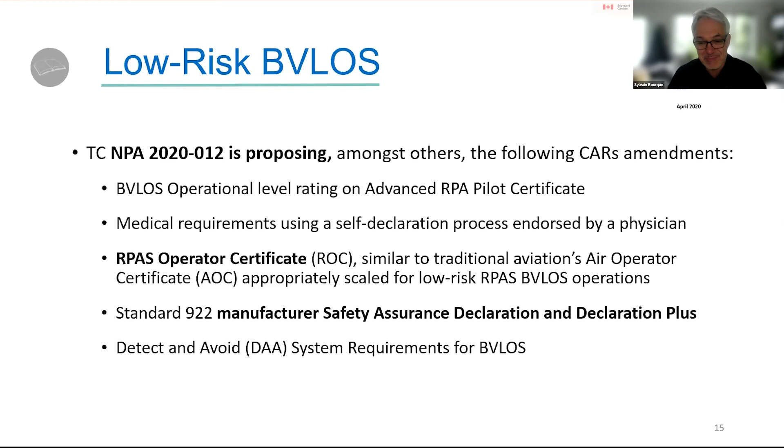There will also be a ROC, an RPAS operator certificate, similar to the traditional AOC but scaled down for low risk RPAS BVLOS operation. There will also be an update on the Standard 922 for manufacturer safety assurance declaration and declaration plus, for higher risk, higher weight RPAs. There will also be information on our requirements for the DAA system, which is detect and avoid, the basis of BVLOS operation. If you don't have a DAA system, you cannot do BVLOS outside atypical airspace.

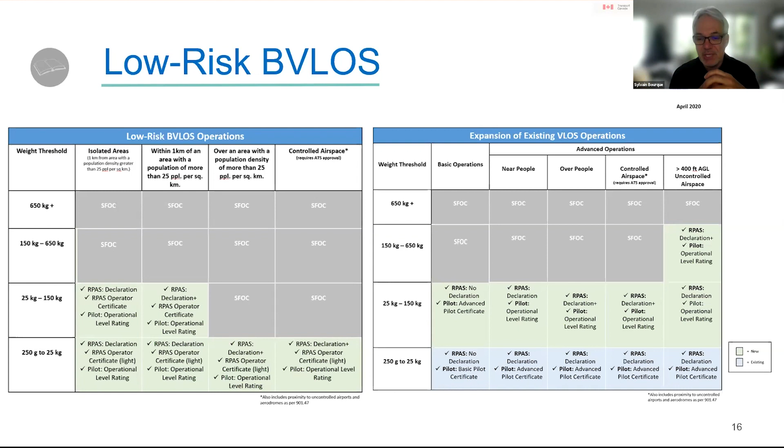So if you could fly up to 150 kilogram RPA with your pilot certificate with the complex pilot rating, and if you're fulfilling the requirements of the regulation, you can do it without asking for an SFOC. If not, let's say you're a 200 kilogram remotely piloted aircraft, no worries, you can still fly with an SFOC and with a risk assessment.

So low risk BVLOS regulation is developed with international collaboration with other civil aviation authorities, including the ICAO RPAS panel. We have representation - we're part of the ICAO RPAS panel, and also we have leadership at JARUS and representation by one of our engineer folks. We also have engagement with other aviation authorities, including United States and Europe. To help set up these requirements, we're also working closely with ICAO, RTCA, ASTM, and JARUS.

For more information, you can look at our drone safety website. Carlos is here with me to answer any engineer-specific questions. Thank you very much.